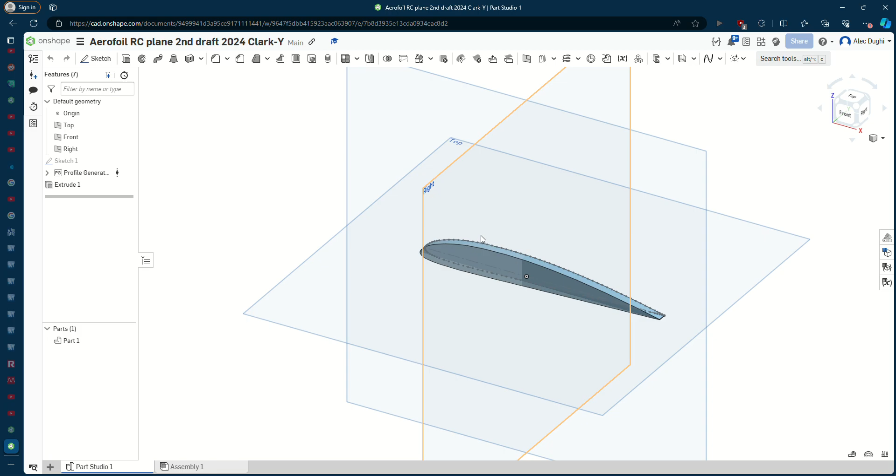I'm gonna try this kind of format because it's easier for me to just talk instead of typing everything out. That way you can speed it up and all of that, because I talk a lot.

Short answer to your question, and I'll write this part out: we'll do 3D printing. Cardboard is harder to deal with than I anticipated. I just put together half of a wing today in cardboard, and it's not pretty. So, and that wasn't going to be our final thing anyway, so let's just jump to 3D printing a little early.

And I love what you have so far. Awesome, you have the Clark Y airfoil. I'll say we'll keep that for now, but we might want to move towards a different one in the future. But for now, this is perfect. This is the one I told you to use, so awesome.

And the reason we might want to move to a different one is just the height here. We might want a little bit more height to make it stiffer, right? But honestly, we might not even need to do that, so we're gonna stick with this.

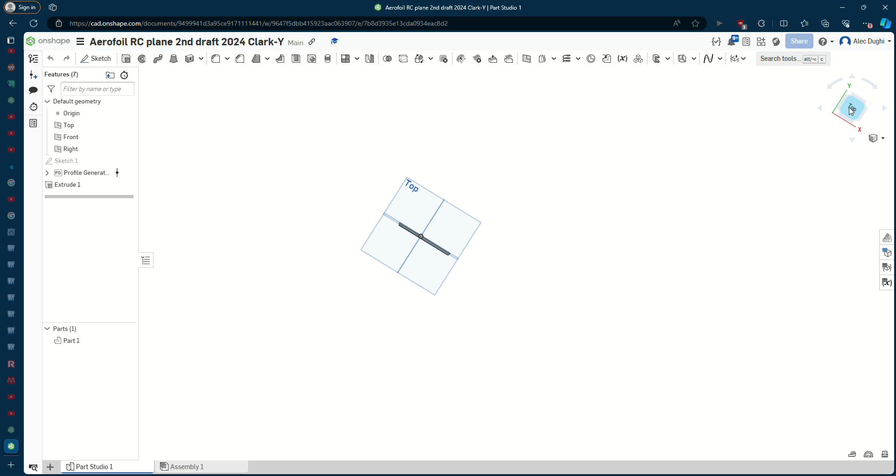Very great, so your extrude is 3.5 millimeters. Thinking about that in terms of real scale - I know you're not in front of me right now, so you can't see the monitor, but this doesn't scale because it's going to scale to your monitor. That's probably close to 3.5 inches on my screen right now, or 3.5 millimeters in real scale, right? So I always like to zoom out and see what it's actually going to look like, because it looks different on a computer than it does in real life.

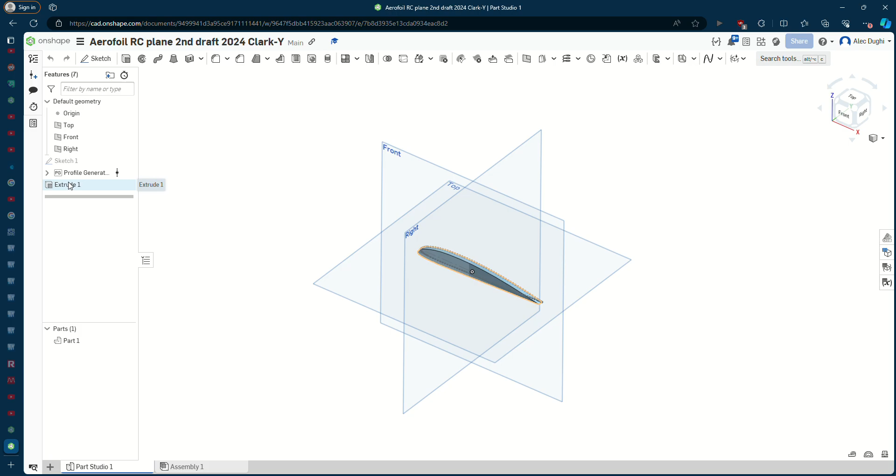So anyway, having said that, I think that's fine. I think we can go even thinner if we extend the edges out, right? I'm gonna make a branch. I'm gonna try to make a branch.

It should have worked. Okay, I'm gonna make a branch from here. Don't worry about what this is, this is just me. I don't want to modify any of your work, right? Because I don't want to ruin it or mess it up. And I want this plane to be yours.

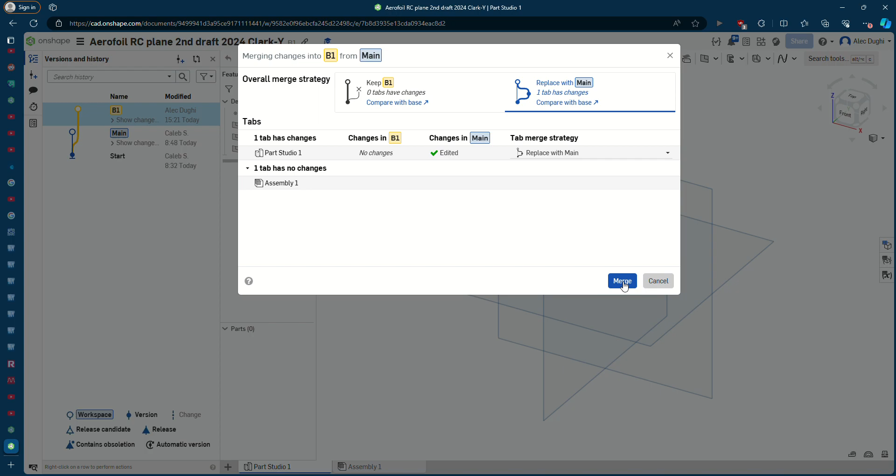So this is your work unchanged, and this is the new version of it that I created. Right now there's nothing in it. All I did was - I'm in this one, I right-clicked on what you have so far, and I'm going to say Merge into Current Workspace, and it's going to take the B1 version and replace your changes, so replace it with main, which is the extrude and 3D print and all that, instead of me having to redo it myself.

Right? So this is still unchanged, this is yours. This one, maybe I'll title this something better than B1. Some people call this a fork, in like version whatever - yeah, I'm not gonna go into that.

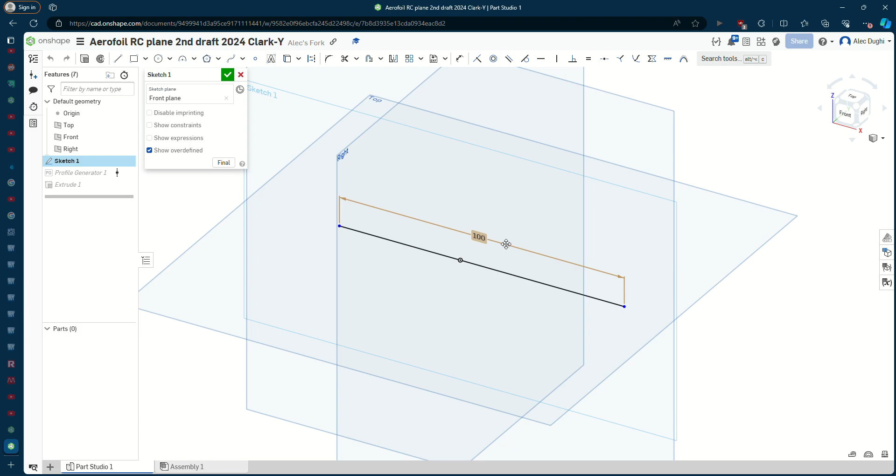Okay, so great, we have a sketch, and this is exactly right, 100 millimeter chord. What I'm gonna do is up here - so there's all these different geometric constraints, right? And you know a lot of them. You know what concentric means. You know, like coincident does a whole lot of things, right?

Tangent - you want to make a line horizontal or vertical. Like right now, this is horizontal, right? So I'm gonna click N to face the sketch fully, and the black means it's fully constrained, right? That's great, so that means the length of that is fully constrained. But the position, you can still drag it anywhere - you can drag it only on this line, right?

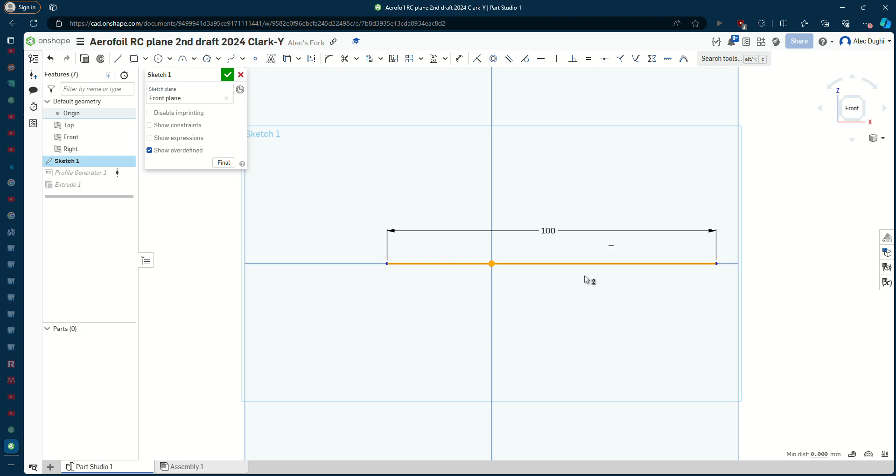So maybe there's a coincident or a horizontal constraint between that point and this line, right? I'm going to add a midpoint constraint. So it's going to say the midpoint of this line - it knows that this line is 100 millimeters long - so it's going to find the midpoint for you by itself, and it's going to say we want the midpoint to be whatever point I give it. So I'm going to give it this point. All I've done is clicked on the point, clicked on the line - the order doesn't matter, you can click on the line and then the point, and then click midpoint. And now it's shifted.

You can double check. If I want to, I can measure the distance between this point, and that's 50 millimeters, and of course the other one. Okay, so that's not super important unless you're placing the piece. By the way, you could do this a ton of different ways, so that's how I chose to do it.

If we want to delete that, you hover near it, it'll show the constraint, and you can literally click backspace. It deletes it, and now we're back to where we were. Instead of that, you could say you want it here instead.

You drag it along - my mouse button is clicked right now, left mouse button - and then if I let go, you see the coincident constraint kind of pop up here? It's kind of hovering, and the point turns yellow and all of that. So that means it's inferring that I want to make that constraint. Okay, so it's going to snap to it.

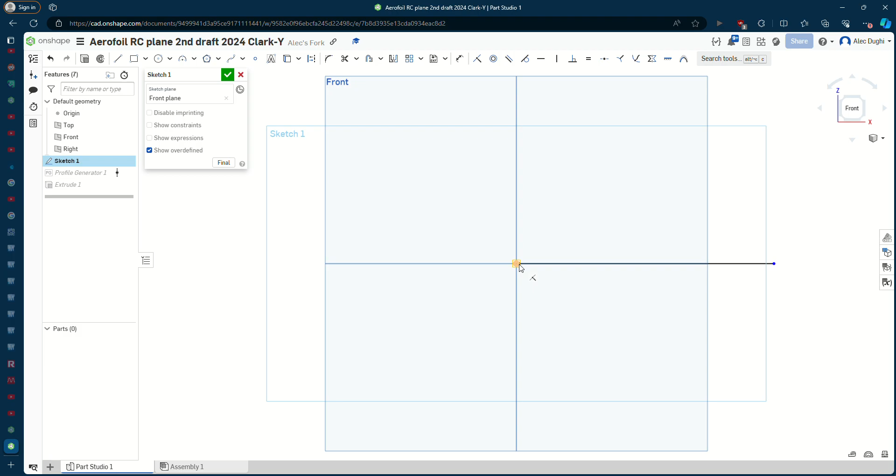Even if I'm not perfect, I'm still holding the button down, just zooming in a little bit. So you can see even if that point is peeking out a little bit and it's not quite perfect, it will snap to it, and all of a sudden it pushes it to be perfectly coincident there. So again, this is now unmovable - it's fully constrained because we have a location, a distance, and a direction.

Okay, I'm going to delete that again. Sometimes you can't quite find the constraint. In this case, everything is horizontal because this line's horizontal, and I think what happened was we made this point vertical with this line. So now if I delete that, now I can be moving it again. It's kind of weird how this works.

So we can go again - instead of snapping to it, we can do that manually. We can say that wants to be vertical, or probably with the point is what happened. And that just means they have the same z values, we're in the z direction. Okay, I'm going to delete that again.

If you don't want it to snap - if you wanted to just get it really close, and for some reason you don't want it to be exactly, you don't want to form a closed loop or whatever - when you feel yourself getting close, if you hold down Shift, your left Shift, then all of a sudden it stops showing up. And so now I can put it even closer than I put it before.

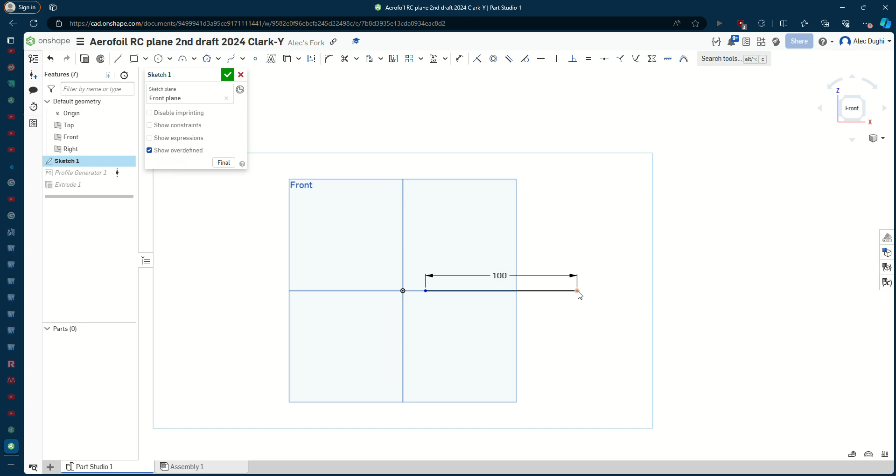Remember the purple was peeking out, and now if I put it right on there, there's no purple peeking out, and then I let go of my mouse button before I let go of Shift. Hard to see, but there's no actual constraint here. See, this purple is still purple, which means it's not defined. I've just shifted it over, but it's as if I shifted it from here to here.

Except I just got it really close here. I mean, another thing you can do is snap from this side, and I'm not holding Shift at all - I'm just doing that. And so again, it's not going to do that because the thing I'm controlling is over here, so it's looking for things to snap to over here, not over here.

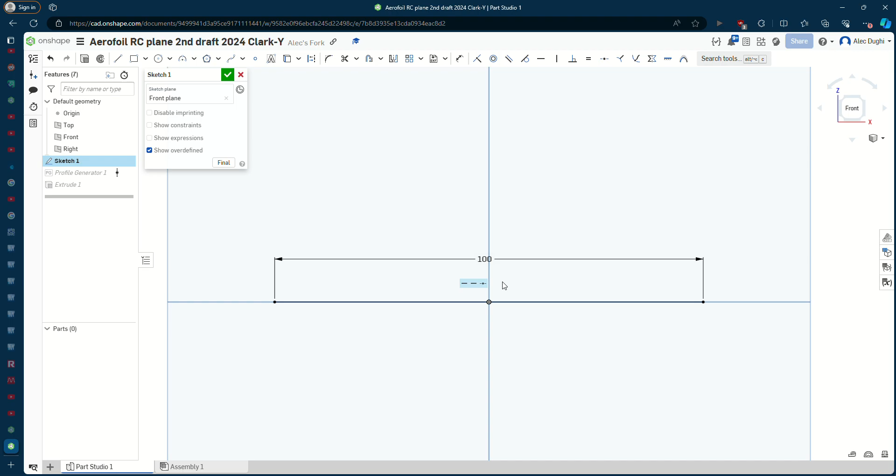Yeah, okay, we're going to build up the knowledge like that. So we have this now. Perfect, I wanted it to be in the center. It doesn't have to be, but that's what I wanted, and so that's what it is.

And then we have the profile generator. You did this amazingly. If we wanted to - it's not facing the right way - we can switch it like that, so that mirrors this up and down, and left and right.

Great, if you don't want to use the database - this stands for University of Illinois Urbana-Champaign. It's a very prestigious university for engineering, and so they have a ton of airfoils. This is not the full airfoil tools thing, but it has a ton of them - it has most of them, maybe all of them. You have single spline, so that's splining the whole thing.

We're not even going to worry about that, actually. I won't even get to that. But I will get to trailing edge type - you can see straight versus curved, and if I click on curved right now... whoa.

Okay, for some reason it's not completing. I've never seen that before.

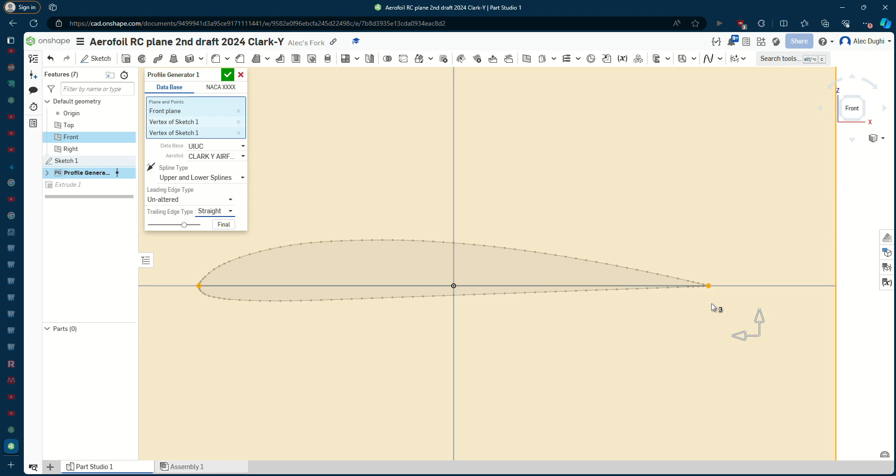We're gonna leave this as straight for now. On every other one of these that I've worked with, the same profile generator, just every other different airfoil. If I click, let's say, if we make this, no matter what I have in the bottom here, it doesn't look like this. It looks like a full curve, a full point. So usually it's a trailing edge, right? So we want it to be sharp, and this is definitely not sharp. It looks sharp because when you zoom out, it looks sharp, sure. And it's sharp enough if we were to 3D print it, probably, because the printer's not going to be that precise. But for things that we need to do, we'll see how this works.

Okay, I'm going to delete my changes to what I did to your thing. Now there's two things. What? Why are there... Okay. What's going on here?

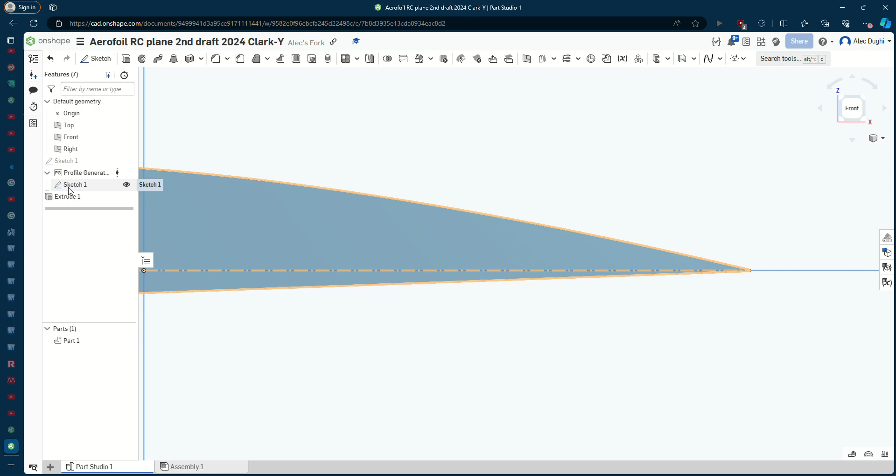This is what I meant, by the way. Right? So this is a single spline, right? And so it's taking... when I say spline, I'm going to hide everything for right now. When I say spline, I'm talking about this curvy thing, right? And so I can draw it, and the main parts of this, you notice how this changes behavior when I connect it or don't connect it, right?

If I put it really close, right? So this is another example of why you might want to not snap it, right? So I'm holding shift right now, and I'm getting, still wants to snap. Okay, but I'm getting it closer than I was. Alright, this is really weird right now.

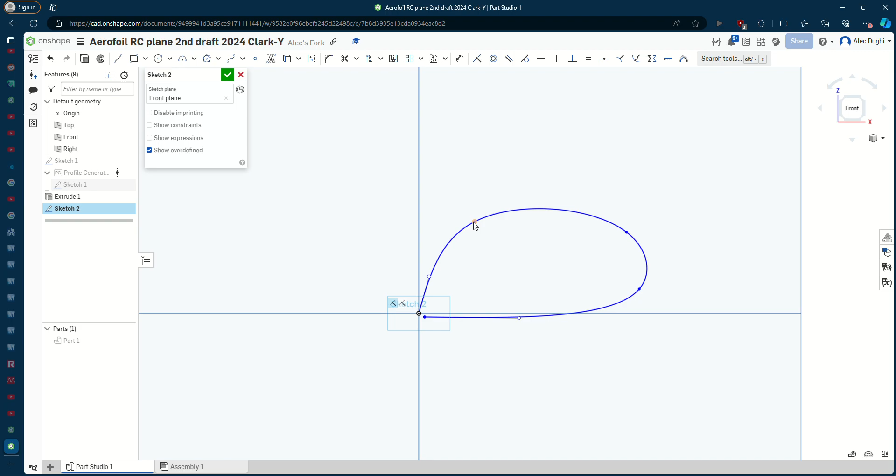So the main points of the spline tool is you can change the position of these points, right? And you can change their slopes, right? So we talk about slope, right? This is just a point in space, but it dictates where the points next to it on the curve go, basically, by its slope, right? And so, you know, if we bring its slope down, these are like little handles that we can drag, then the whole thing changes.

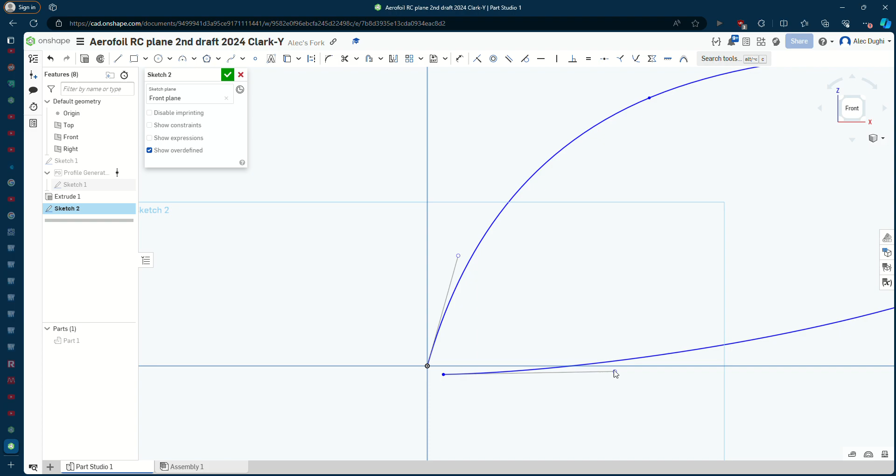But the main important bit is, like, this is a curve. It's very curvy. There's no sharpness to it, right? And that's because the other part of this is these slopes have to be equal at some point, right? So this one slope has to be tangent to the other one. It's actually fairly simple to code, but it's not necessarily so simple to even think about. Right? So people, you know, graphic designers spend some time learning how to use this, because sometimes it does unexpected things.

Right? Anyway, so when we say single spline versus double spline, right, what we could do is, if I connect this right here, it doesn't like it. I'm going to start over and make a new spline. And by the way, there's two types of splines. We're going to work on this one for now because it's just the simplest.

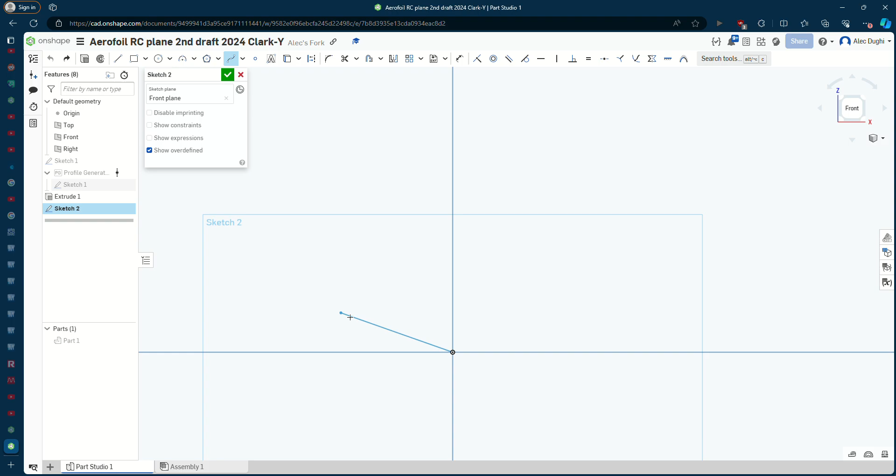I'm going to make one. I'm going to make a real airfoil, because why am I being abstract here? There's no point. So I'm going to make the trailing edge right here, and the leading edge will be somewhere to the left. Right? So it's going to be the simplest airfoil in the world. It'll be like that. Maybe there'll be one there and one here.

Right? As soon as I connect this, if these points aren't close enough to the end here, then it's going to make this kind of smoothness to it, right? And the closer I drag these points, the sharper it'll become, right? Right now it's trying to snap this so that that goes horizontal. I don't want to do that, so I'm gonna go like that, place it wherever I want while I'm holding Shift, and it's good, right?

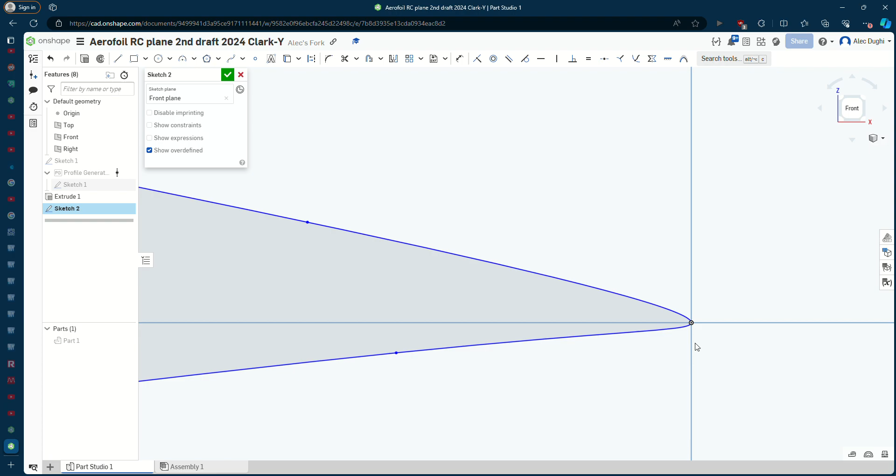And so now that's gotten pretty sharp, right? It's still curvy, right? Because it's always going to be curvy, because that's the point of the spline. But it's much better. It's fine for what we're doing, and then we can change the shape. We can add more points in here if we don't have enough points anymore. But there we go, right? So that's one thing.

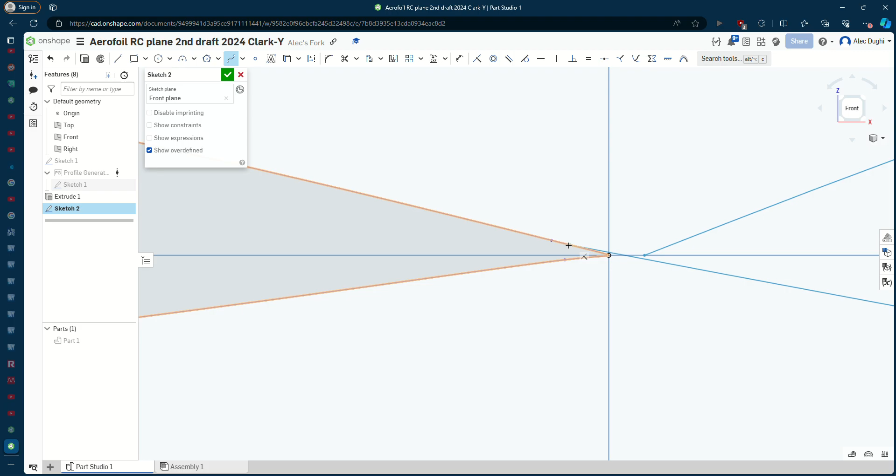If we don't want to do that, what we can do is the same thing on the other side. It's going to be like a mirror image, except I'm not very good at drawing. So this one had 1 at the end point, plus 2, 3, 4, 5 points, right? I'm going to do the same thing, have 1 end point - actually this will be the same end point. So there'll be 1 here, 2, 3.

We'll try this - I don't know why that's there. I'm gonna do it in 2 separate splines though. So I'm gonna have another one here. 2, 3. Because they're sharing these points, it's 1, 2, 3, 4, 5. I accidentally made this horizontal with that, which may or may not be what you want, but for now I'm gonna take that out. And so you see this, right?

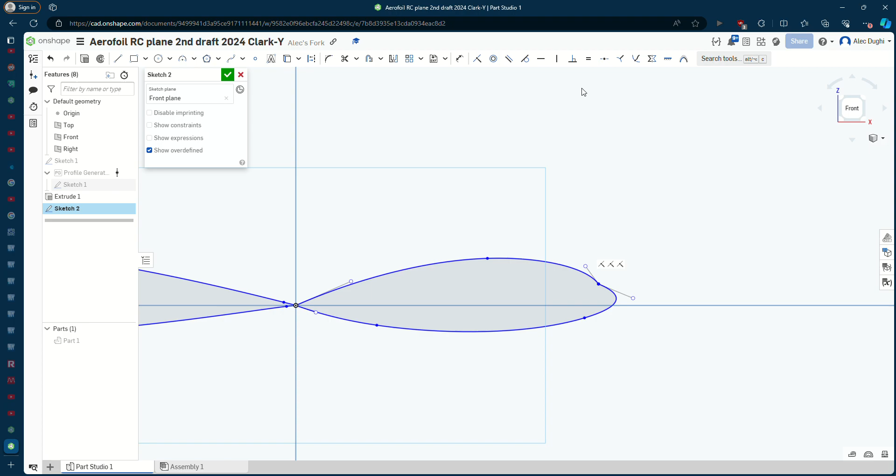And so we can change this however we want, and we can make it not nice, but we want to make it an airfoil, right? Which means these two have to be tangent to each other. So we're going to use this tangent function. I'm going to say this curve is tangent to this curve. When we do that, the whole curve is tangent, and it doesn't like that.

What we mean is just these 2 points. So you could go this handle be tangent to this handle, or to this curve, or actually what we're going to do is just coincident. So this handle is coincident to that handle, and now they're going to be in the same line because there's 2 lines. The only way for 2 lines to be the same is if they're in the same line. And there we have it.

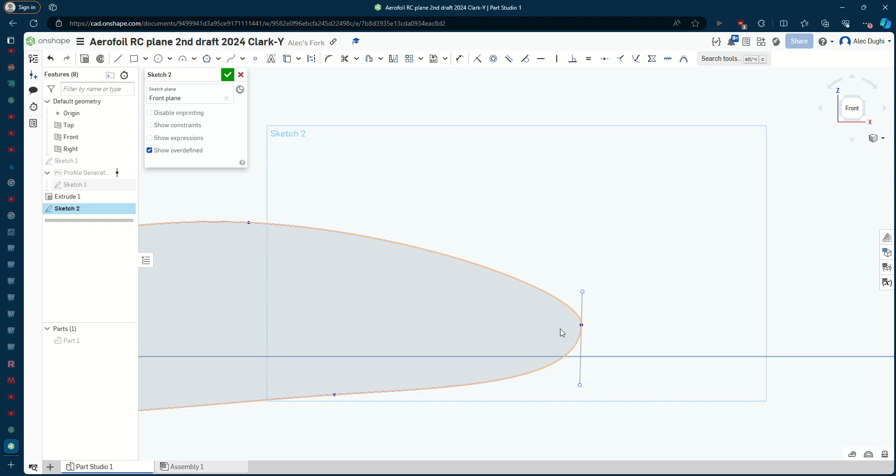So we're going to move this maybe down here. Maybe we want it - if we get this away from it, it'll smooth it more. Let's see what else. We can go like that. So we have a little more control now. Bring that, and this - the main thing though, besides the control, is the sharpness.

Which is more aerodynamic and it's more of what we want. However, it doesn't really matter when we're 3D printing, because in 3D printing, it's going to end up being a curve anyway. The printer is going to come here, do this line. It's not going to stop and come from somewhere else to do the other line. It's just going to go like that. And if it's going really fast, then that looks like a curve. Maybe it rounds it very nicely - our printer is very good, but it's not good enough. So it'll look more like this, and we can sand it down and make it sharper later.

So that's a pro for this thing, maybe. Aerodynamically, again, we want it to be like this. However, and the reason for that is you have air going over this. You have particles, individual particles, and you're gonna have this boundary layer. So you have air coming in here, it wants to go around like here. I'm not worrying about any of these constraints or anything like that.

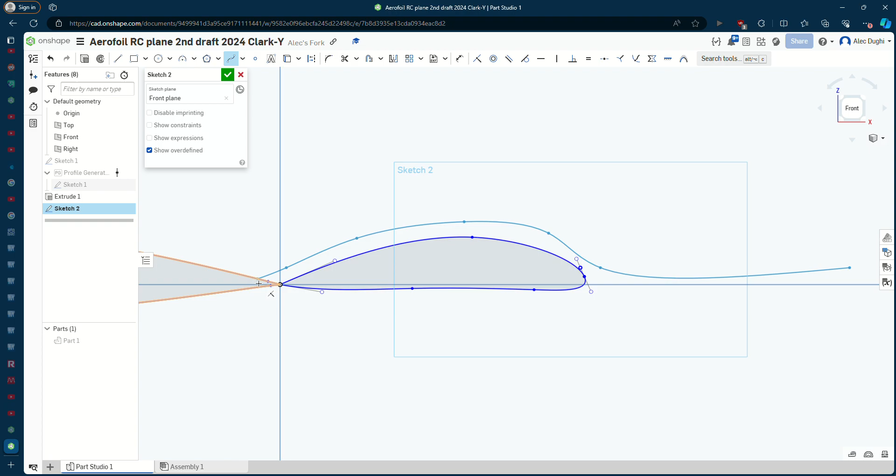So it wants to go like that. There's some particles that are going to go the other way, but the main point is they start out relatively the same, air over here, and they want to finish the same here. So they want to meet up with each other, and the only way to do that, or the most efficient way, is a sharpness here. You want to give it enough time to separate. You don't want to separate it too much.

You start going like this. It's funny, actually, some of these constraints kind of work, but don't - this is not a real physics explanation, so don't get... I'm getting way off track. If your airfoil looks something like this, then the air is going to just go over it, and it'll go into that bump a little bit, but there's going to be separation here. And so the air isn't gonna - it's gonna be kind of a blank space under here, and that's gonna provide a lot of drag.

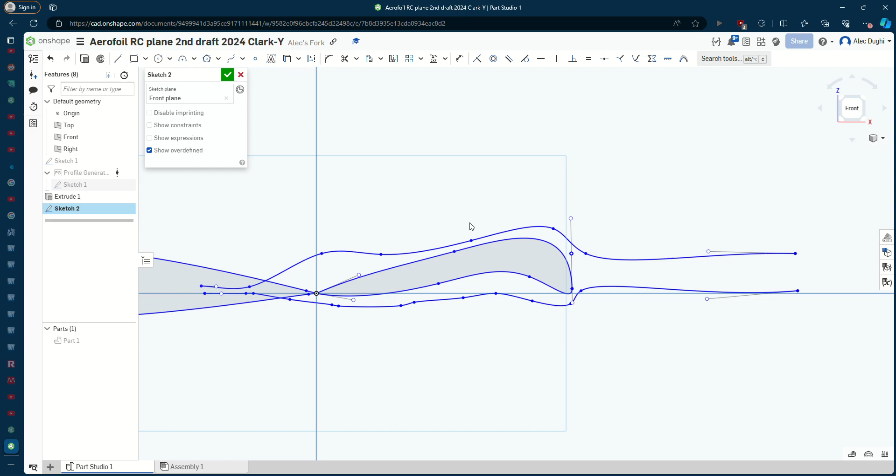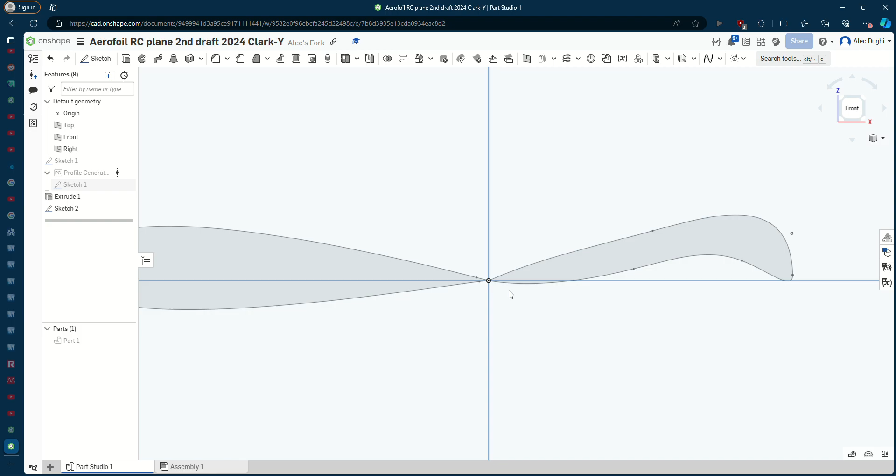I might just cut this. But the main point is there's these 2 different types. And specifically, these 2 different types exist philosophically, of course, but they exist also as tools in this profile generator, more importantly. And so, again, we want the sharpness, but if we use the sharpness - and I remember showing you that this loft tool was acting weird. So we're going to talk about loft again.

Okay, I messed that up. What?

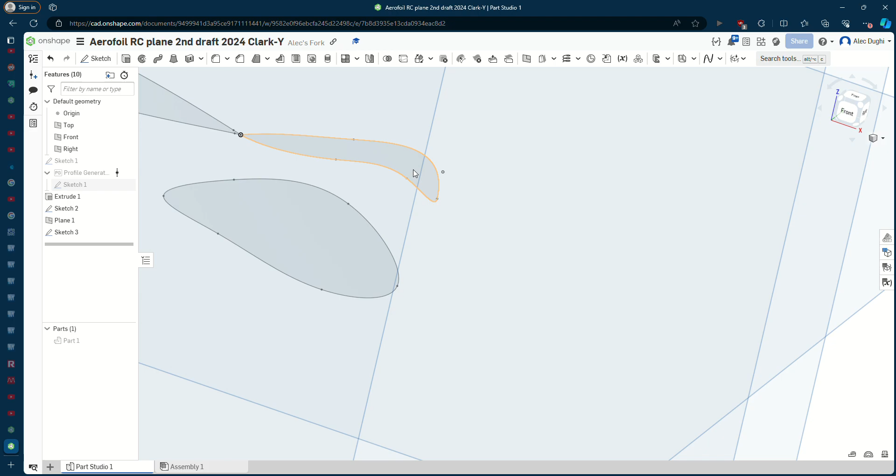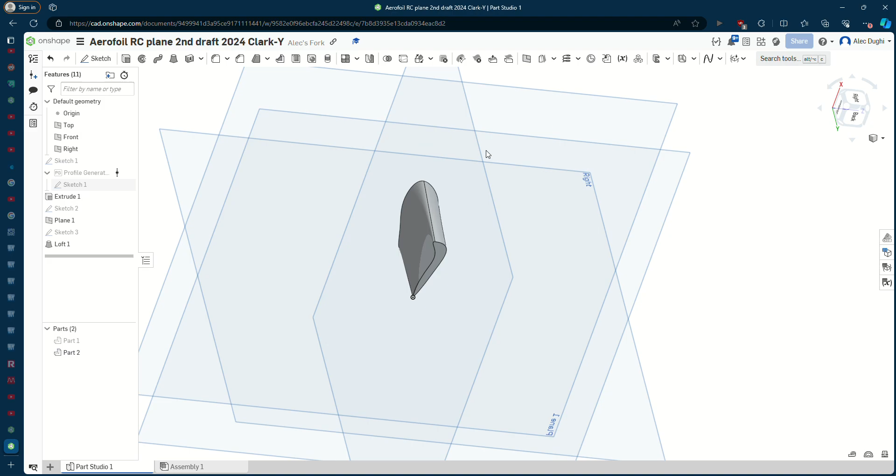Okay, so again, lofting is taking this and going to there, right? It would make some solid body out of that. And if you think about it, you could do that infinitely many ways, because even if this geometry was fully defined, you can have it follow any type of curve. But we're gonna try to do this as simply as possible. So maybe I don't even know the algorithm, maybe it's just the least distance from this point to this point. It makes a straight line, but then it has to have the exact number of points from here to here, so it does some kind of algorithm, and you have that.

If I had some sharpness here and I tried to do that, it might be fine for the first little bit. So sorry, I got kind of, again, this coincident. Alright, that's a pretty ugly looking airfoil.

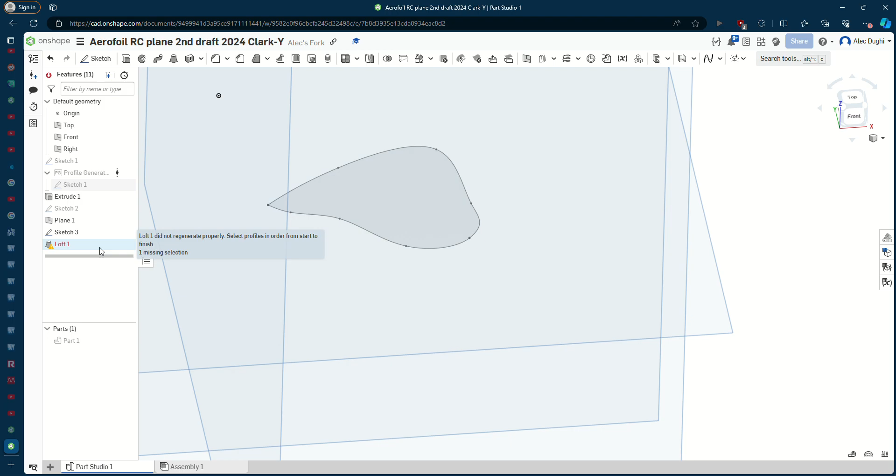Okay, so it still works when I'm trying to show you it not working. Okay, if I click this, does the recording? Okay, if we're still recording, this is when it doesn't work.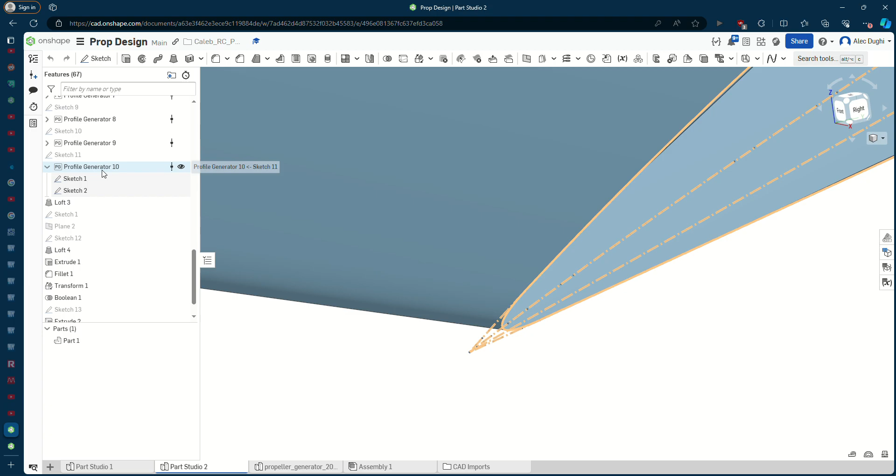So this is a propeller design that I was working on last week, and it's done basically. But all I was trying to say, so maybe I should just cut all that. All I was trying to say was...

It's taking a second. The profile generator, same thing, right? You choose your plane, you choose your points. I'm using the NACA instead of the database. You might be able to find a NACA airfoil in here, the right one, but it's easier if you just... yeah, these are all NACA.

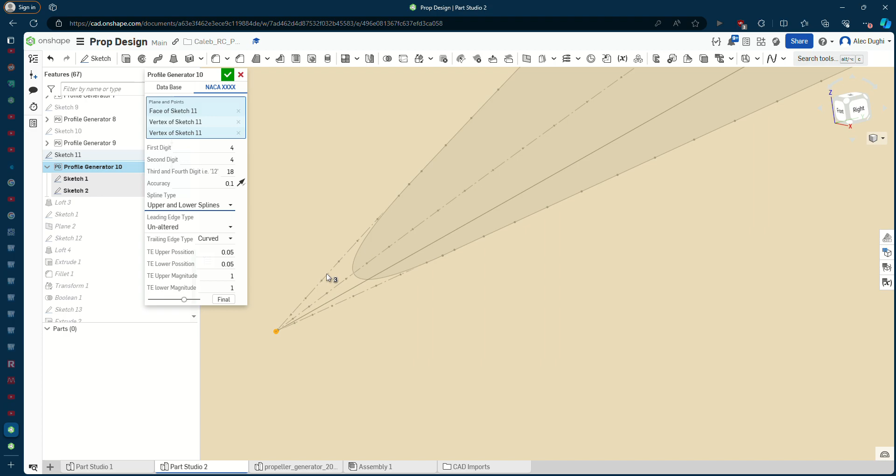4418. So if I click this versus if I type in 4418, it should be the same thing. I chose upper and lower splines. The main thing I chose was curved, right? And this was not working for a long time until I chose curved. And so that's basically the sharpness here. It keeps it as the geometry, because that's what the wing actually looks like. And then it adds this curviness here, so that it's not a sharp point.

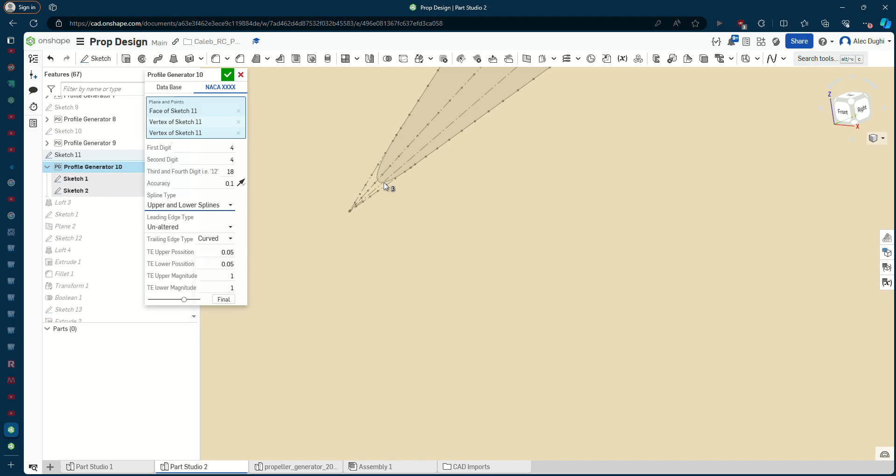A singularity is what I would call it. So the loft, however it does it, is going to take all of these points and map them to something over here, which means mapping every single point between the space from here to here. And you can do this for many different profiles. So I did it for 10, probably too many, but it goes from here to here to here, and so on. And it would not work with the singularity here, because it's trying to match slopes and positions in all different dimensions, and it just doesn't like it.

So anyway, loft, if you ever have a problem, and honestly in a lot of CAD, if you ever have problems, it's probably because of some sharp points or some self-intersection. So that's what I had to do.

This is a propeller that I've 3D printed. It works decently, and I will talk about this a lot more sometime. But for now, back here, aren't you glad I made my own version now?

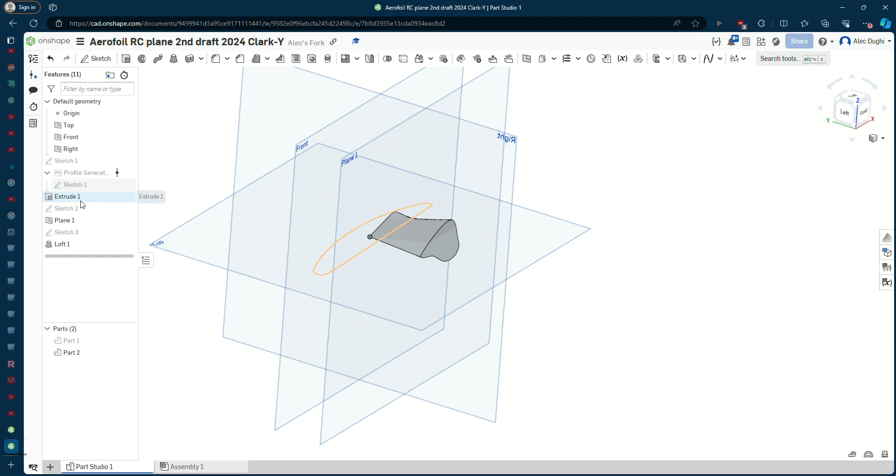I'm going to go ahead and delete all of this, and we're going to show your part, and get back to it. If you don't want to see these dots, you can hide the sketch, but it's not a big deal.

And again, this is some weirdness. I've never seen that before. So we'll see if this works, or we can move to a different airfoil. It's not a big deal. So we have that. Great.

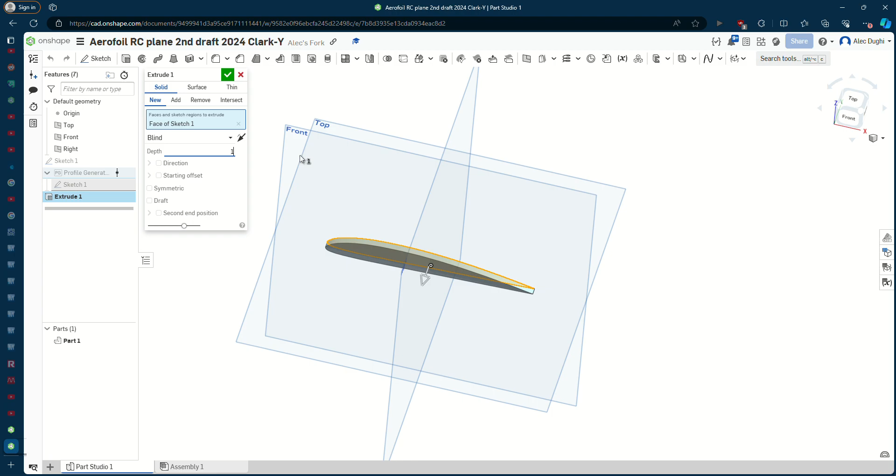I'm going to make that a little thinner, maybe 1 millimeter, if we can kind of just extrude the outsides of it. So I'm going to click here, I'm going to make a sketch.

I realize I've been talking way too much, so I'm going to try to do this very... I'm not going to explain so much, I'm just going to do what I'm trying to do. So I mean, I will explain a little bit. Okay, I'm not.

Okay, doesn't like that. Oh, at that distance. So I created a sketch on the face, and I'm trying to offset this profile. Another thing about offsetting and sketch tools in general, there are tools like mirror, for instance, or linear pattern, or any of these things. Fillet is right here.

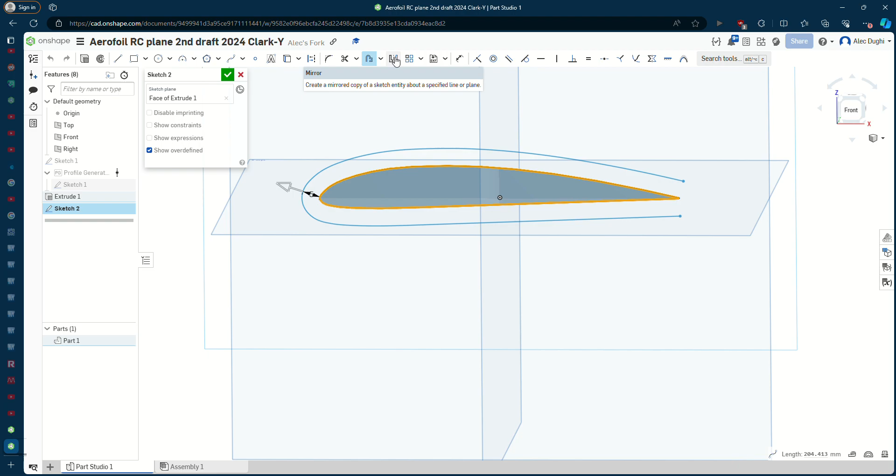Almost all of these things are better in the 3D version. Sometimes you can't get away with using it, but I absolutely hate using mirror sketches. I would rather, if I had to make some kind of shape, make that shape again on the other side, and just put in the necessary dimensions and geometry constraints. I can make this horizontal here, or whatever, and keep doing that. I'd rather do that because this thing is not modifiable at all.

If I do this, I'm going to select the mirror line to be this thing, and go like that, and that's it. Once I click out of it and click something else, I can't change this, or I haven't found a way to. You see these constraints, and that's great, but then I can't double click to edit this mirror line, or edit what I'm mirroring, or whatever.

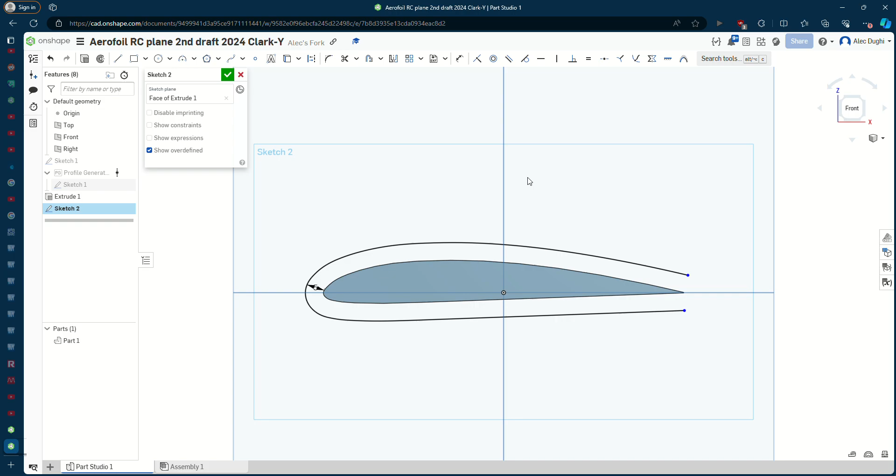And so you can do that too. You can use mirror outside of sketching. Okay, we're back. So offset's the same thing. You see this constraint, but that's all you see. But we're not going to worry about it too much. I'm going to go with, I want it to be on the inside, and I want it to be like 1 millimeter or less.

So I don't know how to get it on the inside, and this is exactly what I mean. Okay, that didn't work. I cannot seem to get it to modify this offset, even though you can drag this. So I'm going to delete the whole thing. That's what you have to do. You have to start over.

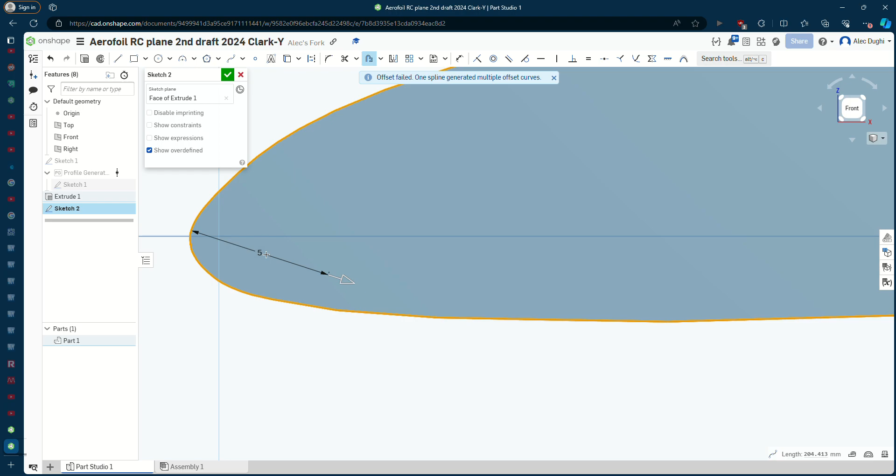I'm going to do the same thing, and click this button to go onto the inside of it. And it doesn't like that, but I think that's because of the distance it is. So I hate this so much. Okay, offset failed, it's fine. So I don't have to delete anything because it failed, so there's nothing to delete.

But I'm going to click it again. I'm going to click what I want to offset. I'm going to make it 1. I don't even know how to type it in, do I double click this? Make that 1. But now I can't click the other thing.

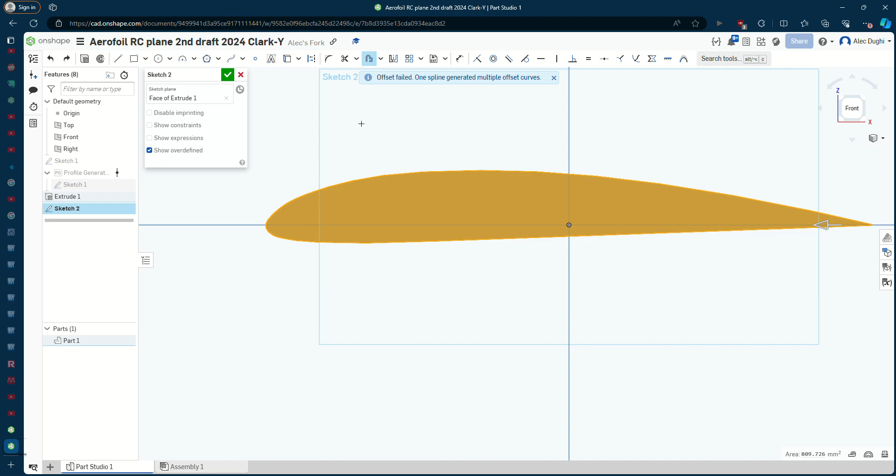This is a professional engineering tool, guys. Okay, go that, and so it doesn't like the distance, but I can't change the distance because... Okay. Very disappointing Onshape.

Again, I said, you know, I was preaching, oh, we'll use the 3D version of it. We can go ahead and do that. We shouldn't have to, but I'm going to take this edge, which is an edge of a three-dimensional object. It is not fully enclosed, it's just one continuous line. You can see the length of it, it's 204 millimeters, so that's great information.

If I wanted to create something to wrap around this to make a wing, if it's super long, like a piece of cardboard or whatever, I know that the circumference is 204 millimeters.

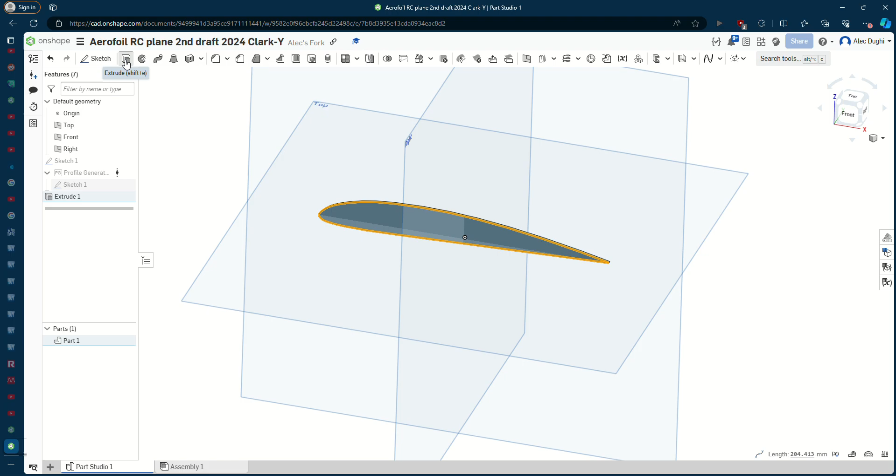So I'm going to take this, I'm going to extrude it, and you're going to say, well, how are you going to do that? It's not really something you can extrude, and you would be right. For some reason, they think it is. Okay. It thinks I'm trying to extrude the face, and that's not a sketch curve. Okay.

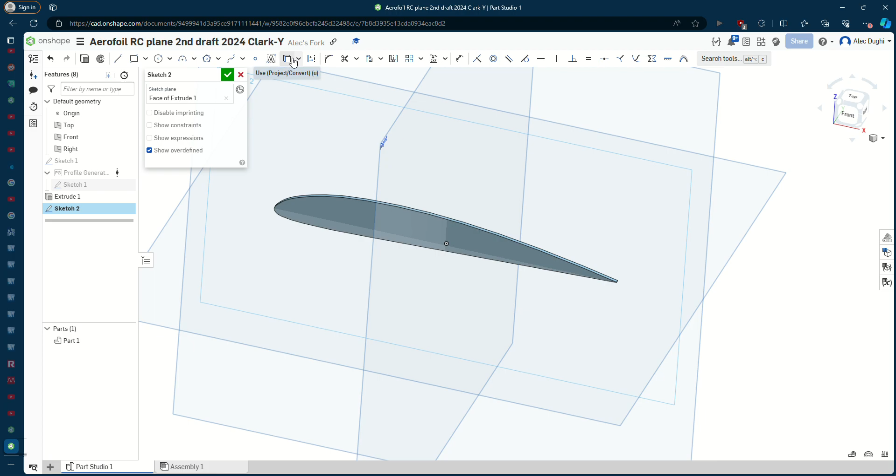I'll create a sketch on this face, I'm going to use the edge here. All I did was say I want to basically create a sketch of whatever I want. Again, I don't want to go super in depth, so I'm not going to. I would show an example of use, I'm not going to get into that, but please ask me if you want to learn more.

I'm going to go to extrude. I'm going to click the sketch. I'm going to use the surface, and there we go. That doesn't look like a surface to, oh, it does. Okay, good. So there's no distance between these.

Okay, backing up and slowing down a little bit.

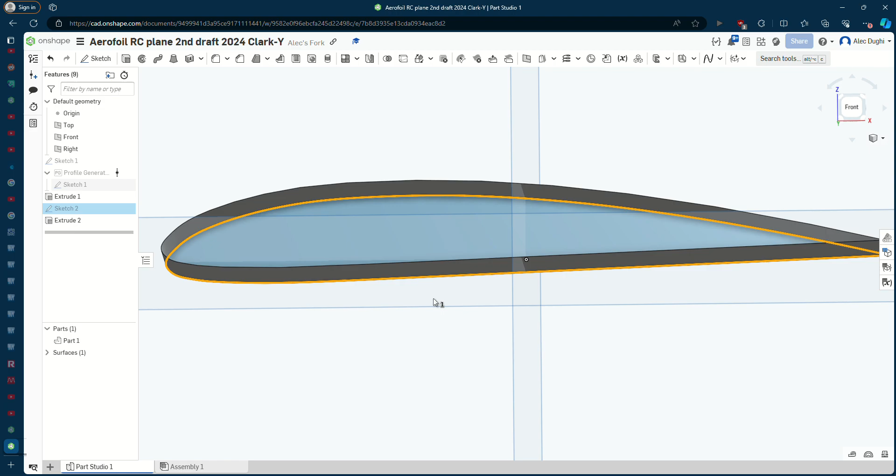Once I had this line that I liked, this is just from your profile generator, and I guess it did include this. It's fine, doesn't matter.

You can extrude a solid body, which is this one. This is your first extrude that you made. That's great, it created a new solid body, and all that means is you can, if you wanted to, 3D print this right now, and it would come out exactly like this, 1 millimeter thick, and all that.

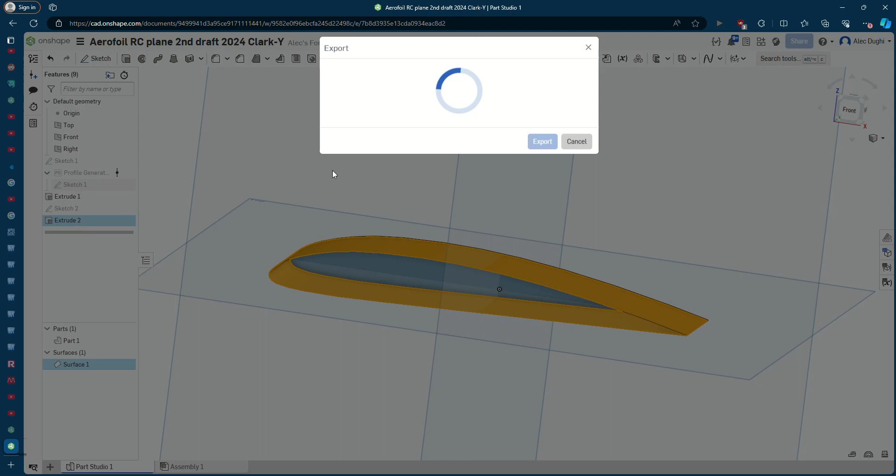This is a surface, and so it has no thickness to it at all. If I tried 3D printing this, export as an STL, I think it would show up as a problem when I tried to actually click print, because there's no substance to it. It's just kind of a mathematical tool to represent position, like a set of points.

But a point, again, is non-dimensional. It doesn't have any substance to it at all. So this is just a collection of points, an infinite collection of points if you think about it.

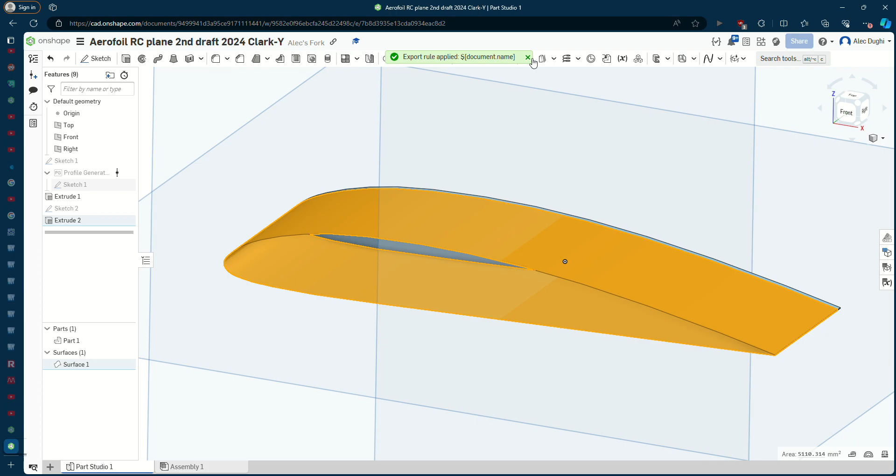So we're going to use thicken, and now we've turned this surface that is non-physical into a real thing. If you're trying to thicken it too much, so I thickened it on the outside, it was completely fine, with 5 millimeters. You can thicken it however much you want, because it's not intruding on itself. And so that is kind of a crazy thing.

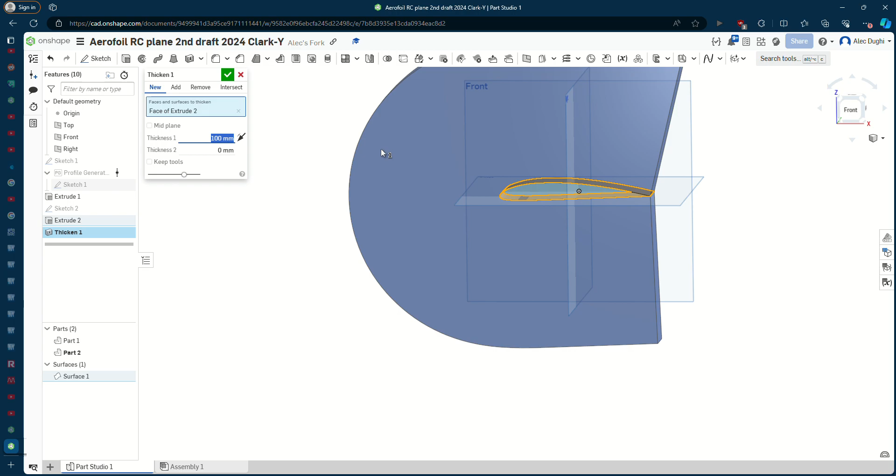But if you pick a point over here, the corresponding point here is exactly where it should be. And if you were to extend this all the way, this first nose bit should be exactly the same geometric shape as this nose bit. I don't know that for a fact, but it's starting to look like it. I'm gonna go back to 1.

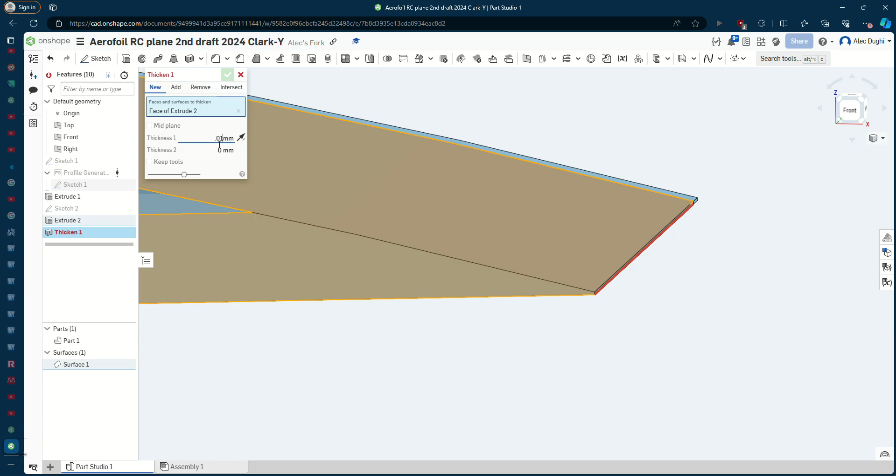I'm gonna change it to the inside, and now the inside is kind of fighting against itself, because if it starts intersecting itself, it doesn't like 1 millimeter. It doesn't want to intersect itself - so that's the thickness right now, I think it's 0.01 millimeters. Something is weird. But if it starts intersecting itself, it doesn't know what to do, it kind of freaks out. We're gonna keep it as that.

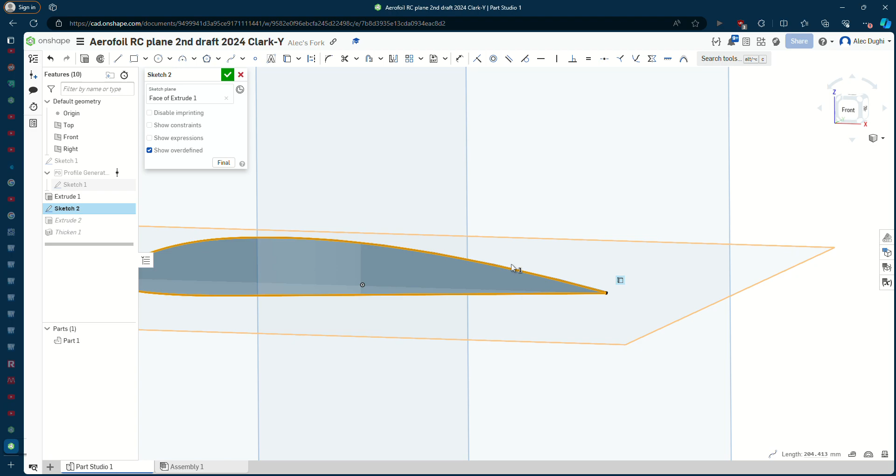I'm gonna go back into this and delete this part, so that edge still exists, but in this sketch, it's not a line. This sketch, this is a line - that's what the use function did. And I only want to use the curve, I don't want to use this bit. This is kind of the tail of this is all weird.

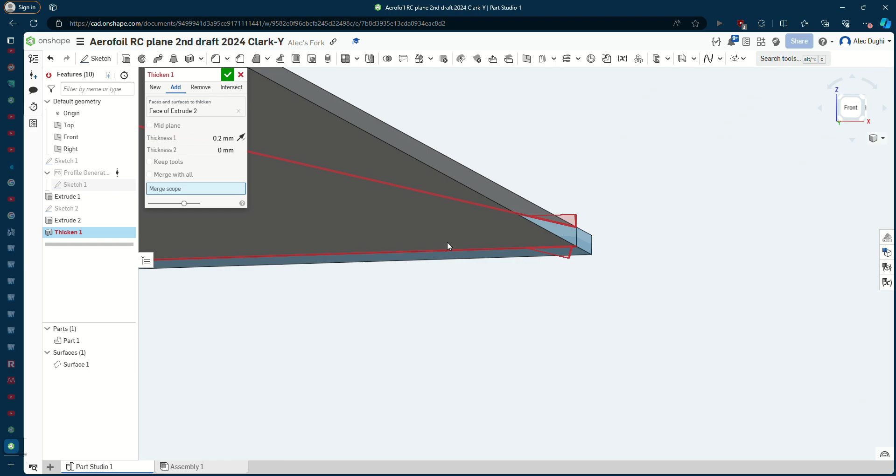So I'm gonna go back to thicken because somehow it reverted to 5 millimeters. Change it to 1, change the direction, and it still doesn't like it. Let's go with 0.2 millimeters. It's doing some weird stuff here, some very weird stuff, I don't know what it's doing. Okay, that's what we want, but because of this, it's being very weird.

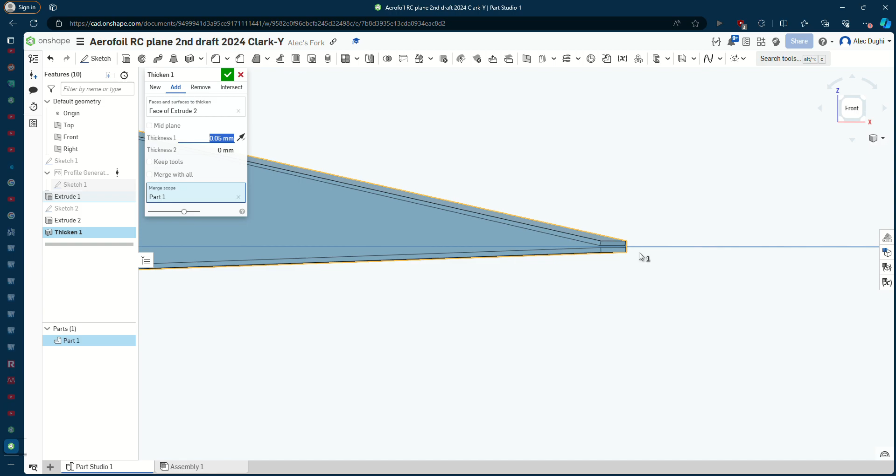This is exactly the situation where engineers will blame the CAD software, and the CAD software will blame the engineers. It's probably both of their faults, but people grapple with this as a job - people get paid to just tear their hair out about stuff like this. So real engineering, yay.

We have now created - so we had to go to 0.05 millimeters. First I went to 0.01 just to make sure there was a floor, that this thicken was even physically possible with their algorithms. And it is. So I try to increase it as much as I could - maybe 0.06 will work, nope, it doesn't. This turns red, that means it doesn't like that. So we're going to go to 0.05 and that makes it happy.

There's a better way to do this, but I think the easiest way is just to get this sorted out. The sharpness here - now we have 2 singularities instead of 1. I don't know how this happened, but again, this is not my point.

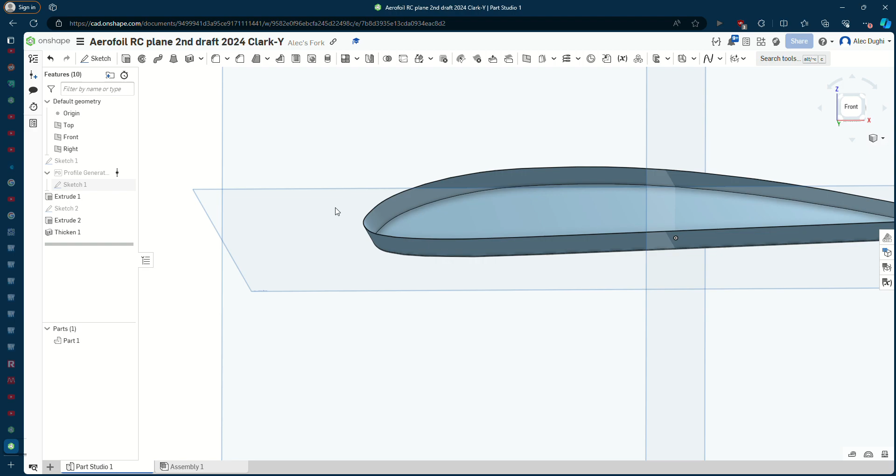So we have a thickness now. We could 3D print this part, and it would not turn out very nice, because the average width that we 3D print is around 0.5 millimeter. This is 0.05 millimeters, so that's... can't be right... 1/20th, 1/10th the width that we want. Wow, I'm really bad at math. So also we can extrude this less, we don't need that much.

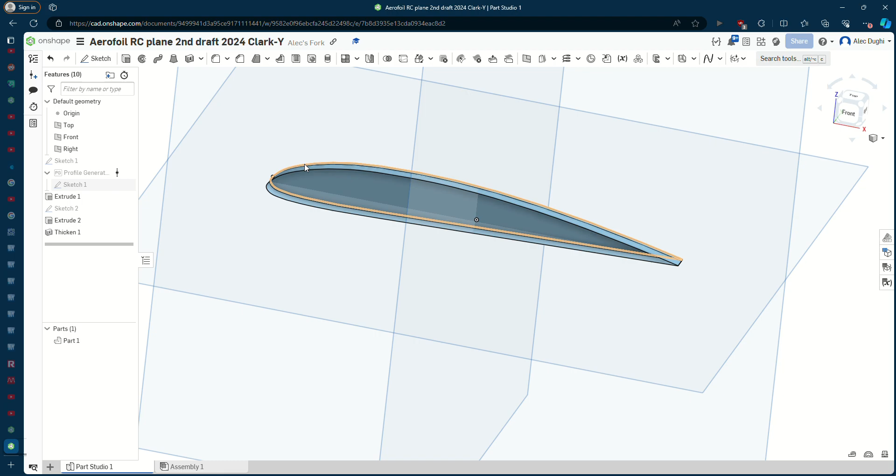But again, this is—if I wanted to do this, I would have... how do I say this? I want you to do this anyway, right? So this is me walking through it for you. In your case, if you want me to walk you through it more with you, it's totally fine. But in your case, I would first fix the tail here, and then we can talk about it.

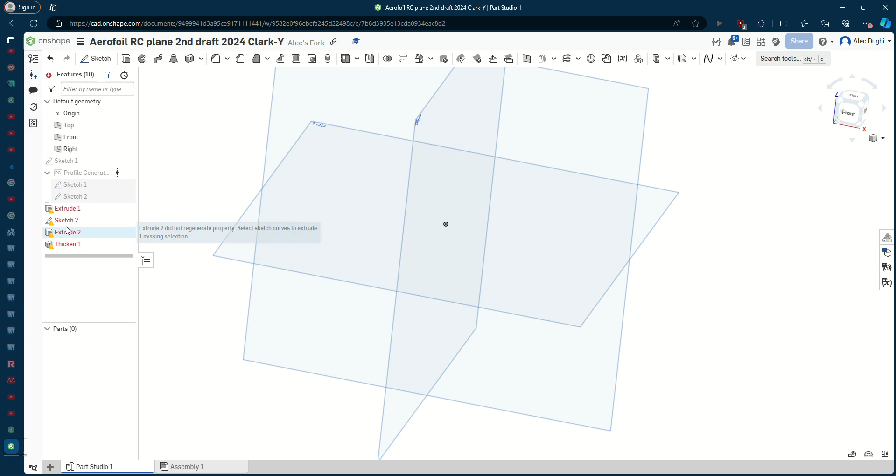So how I would do that is probably mess around with these, right? If none of that works—see, now we're seeing what I expect to see. Problem is when you change something up here, sometimes that messes with everything down here. That's totally fine, don't delete it. Don't go ahead and just delete these things as your first instinct.

What's happening is it's saying it's missing the face of the profile generator. You changed this thing, and so now you replaced it with something new, and it needs to know what you replaced it with, so you can easily take that out and replace it with that. Great, I'm gonna hide that again. This is already looking much better. I don't know why I didn't just do this to start.

Sketch, we're going to sketch that. What was the sketch? So the external references here, this is use, right? Again, it's like projecting on the plane that you're sketching on. It is projecting whatever you tell it to, right?

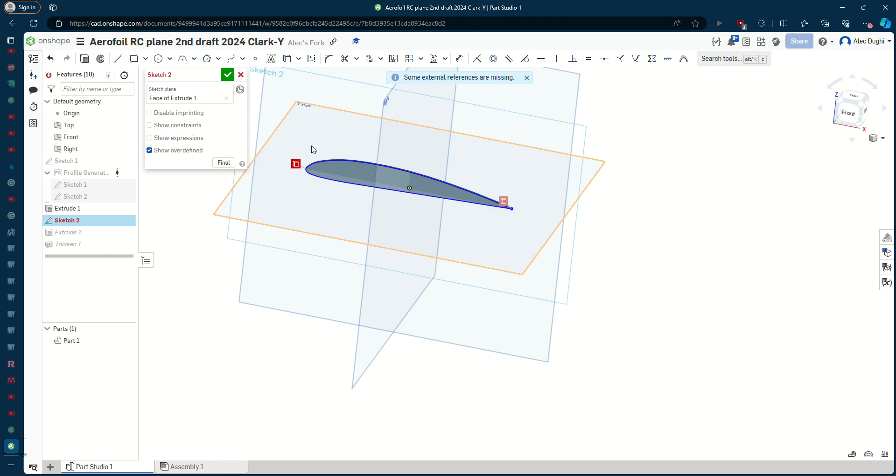The shadow of it, right? And so it's missing here because, again, that was an old body, and now this is a completely new extrude because we've updated it. So we're gonna go ahead and delete this whole thing, and then click use again. Boom, right?

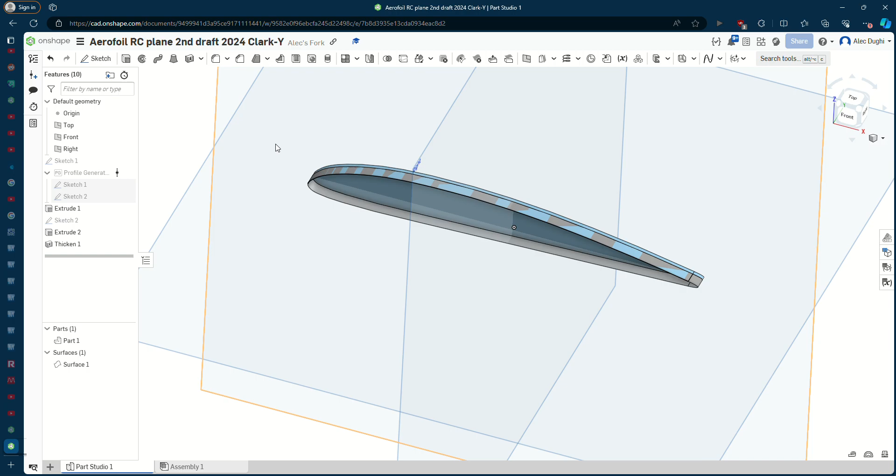You won't always have to be updating this like this, but for now, that's where we are. Now it's missing that, so we'll go ahead and merge. We want to merge it with this piece that you made before. That works. And let's see if we can get away with thickening it. Great, let's do a millimeter. Okay.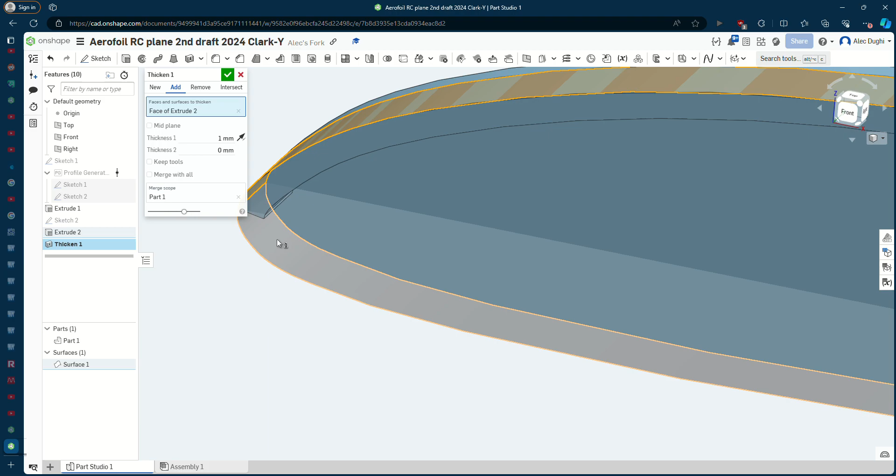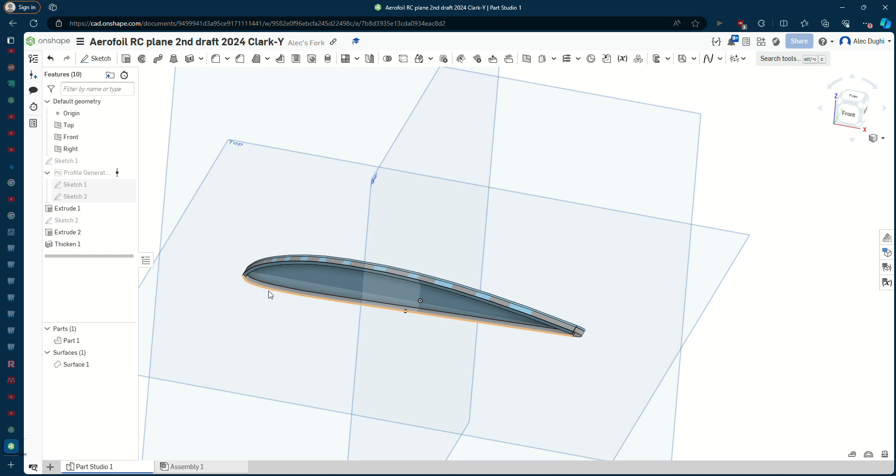Sorry, again, this is not behaving. So it likes that. That seems a lot more than 1 millimeter to me, but I guess it is. I'm going to try to thicken it in 2 different stages.

And so now it's not having this intersection problem, right? So you can see the problem that it was having before. Obviously—or not so obviously—but this intersects with that one, and so it doesn't like that, because it doesn't know what do we do about double counting this region. But now when we do it as 2 separate things, then that's okay with it.

So maybe a 3rd separate thing should work. No, this still doesn't work because it's doing that within itself now. So let's see if I can show you. With 0.5 millimeter, it's fine with it. With 1 whole millimeter, it ends up encroaching on these corners here—I think they end up encroaching on each other. So we'll bump it up to see how far we can go.

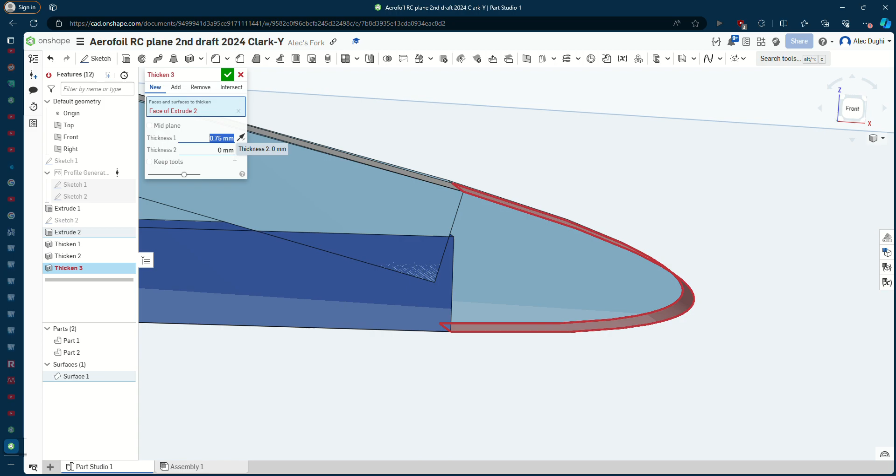Right, 0.75 works, 0.8 does not. Try 0.7—works. So then 0.73, 0.74. I hate that you have to do this, but it's kind of where we're at. And that's basically filled—there's a little sliver right here. Don't get too hung up on this type of stuff.

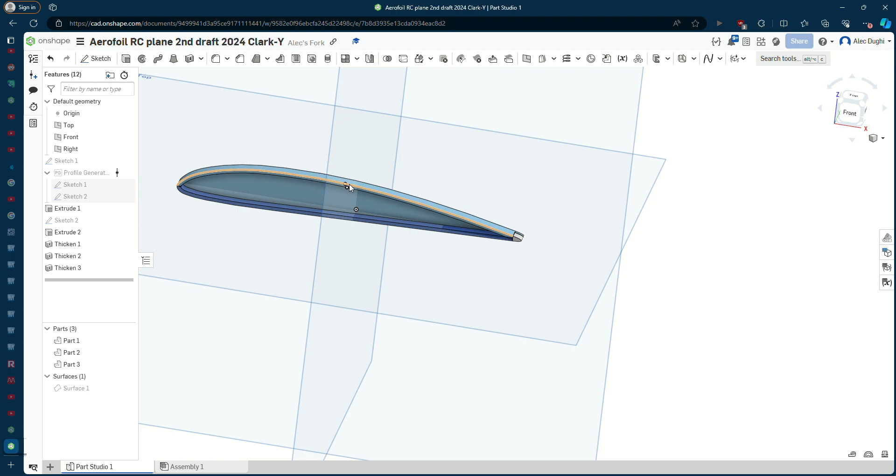I might come back to this and figure out a better option. So this is one way to do this, what we want, but there are many better ways to do this—this is just what I thought of. But now you have 3 different parts, right? We have the surface still. We don't need that anymore because we have the solid bodies that we want from the surface. But we have this surface—or sorry, we have this part.

So that's your original extrusion plus the top. We have this bit, and we have this bit. And honestly, if we went here and clicked add instead of new, we merge it with your first bit, then okay, that likes it just fine. So within thicken, it doesn't like it, but if we do that—instead of new, we're adding it, and we're merging it with just the existing body already—then it's great. It looks like that's closed up, so awesome.

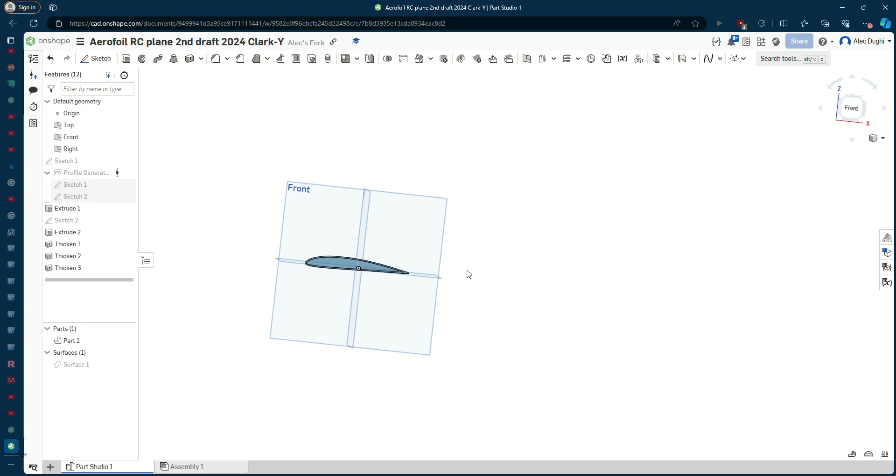So think about how, like, this is 1 millimeter right here, so it's gonna look more like that, or however big a millimeter is on your screen. It's not very tall, right? So it might not resist some serious bending. Again, we'll see, it'll be fine. We'll use this for now.

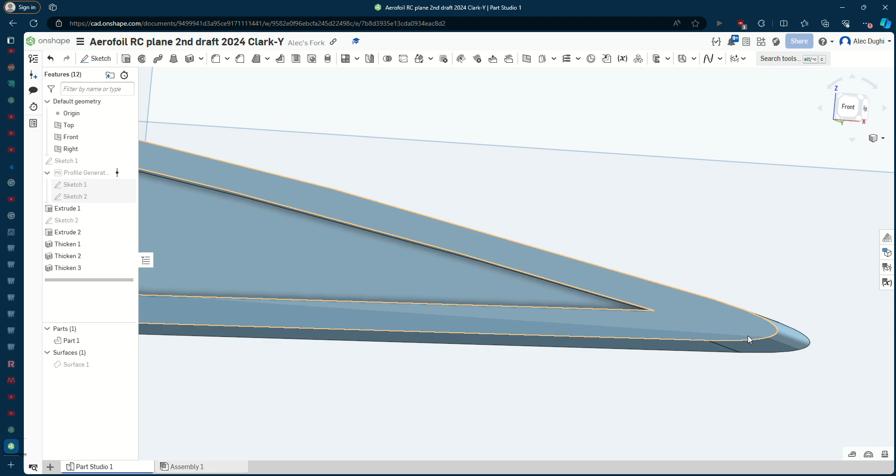So we have this. The reason I had this rib right here, the whole reason I went through all that work, looking at this now, the better way to do this is to extrude the whole thing and then cut out a section. So we can do that next time, or maybe I'll make another video.

Notice how this is sharp and this is not sharp, right? This is not sharp because of CAD. We kind of need it to be not sharp, and it's fine if it's not perfectly sharp. This is sharp. Again, in 3D printing it won't be, but it'll be decently sharper than this, and that's fine. Again, we don't care, but it's interesting, right? Actually, we kind of do care. Well, no, we don't care at all. It's fine.

You have this. Well, great. We don't have to, but I want to do the same thing to the other side, except I don't want to do all that work. So what we're going to do is mirror.

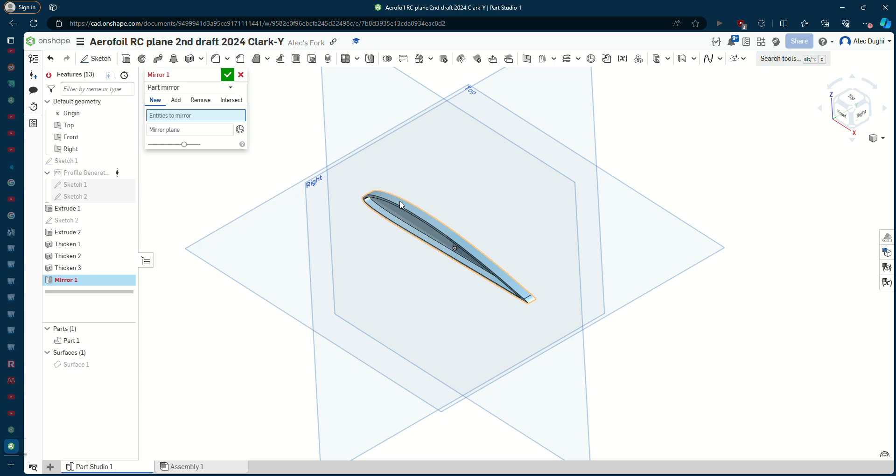We're going to mirror. It's going to be a part mirror, right? So if we want to mirror the part, we can mirror the whole thing. Well, we could maybe do that. The mirror plane would be this. Yeah, okay, that works, and we want to merge it, right?

So we want to merge it with its first half, right? So I created its own clone and then glued them together, because it's add, not new. This is a new thing. That would make 2 separate parts, and we can glue those together separately if we want, but we don't have to. We can do that here.

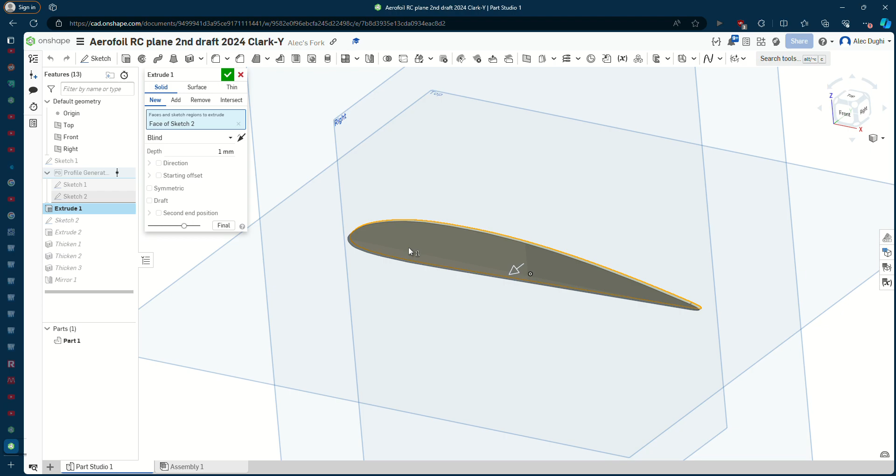Okay, so notice that the distance between this part and this part is 2 millimeters, right? Your extrusion, your initial extrusion, is only 1 millimeter. So obviously, all it says is you mirrored the extrusion as well. So that's fine, I think that's a better part in general.

Now let's talk about actually 3D printing this, right? So, let's talk about why I did this to begin with. We could totally have printed the original thing. The distance between this bit and this bit, kind of that distance, is 8 millimeters now.

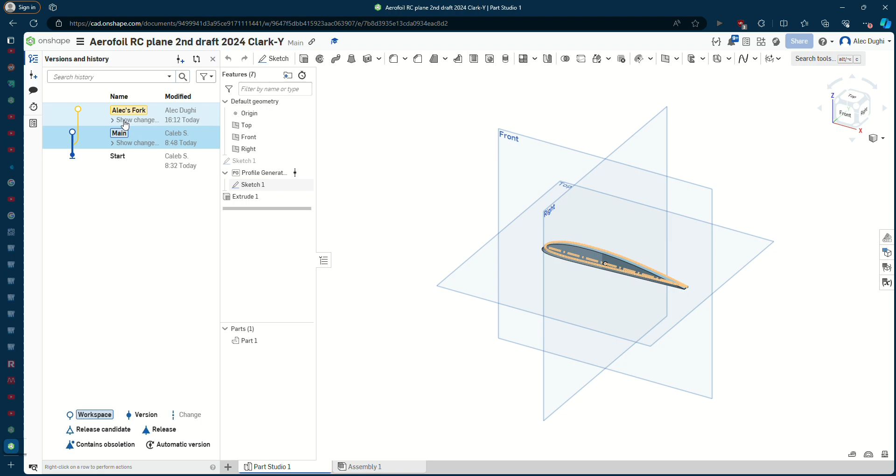We could have gone ahead and instead of changing your 3 millimeters or whatever - sorry, just for ease, I'll show you a thing. I'm gonna pretend like none of that happened. So we're back to your thing, and instead of 3, or instead of 1, we're gonna choose 8 instead of 3.5, right? That could have been the same thing, but this is

pretty heavy now, right? If we're 3D printing this, a lot of the times when we're 3D printing, we're not printing 100% infill. Like there's some air in this. But even with the air, it's still a pretty heavy part, because whatever you're doing on the inside here, you're doing for the whole 8 millimeters.

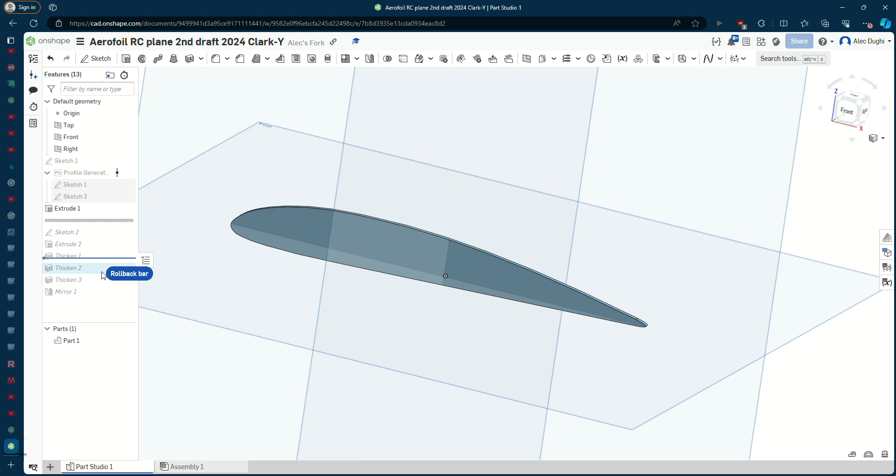So all this being said, I just want to do that. The reason we want to make it wide is for alignment and all of that, right? Imagine if it was paper thin and you try wrapping something around it, it can easily just collapse to one side or the other. Let's say we're wrapping something around it, and it just goes all the way to the left or to the right - there's nothing really holding it up. Now it's got some feet to hold it up, or hold it in all directions, not just up.

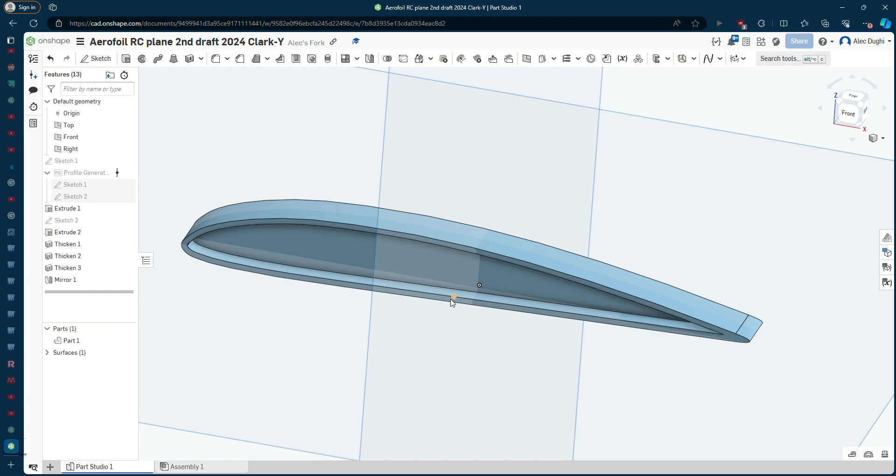So there's that. The reason these are 1 millimeter is because that's kind of the smallest we can get away with. We can go with 0.5 millimeter, probably be fine, but it wouldn't save a ton of weight. Let's see. And that's about it, right? So that's kind of decent.

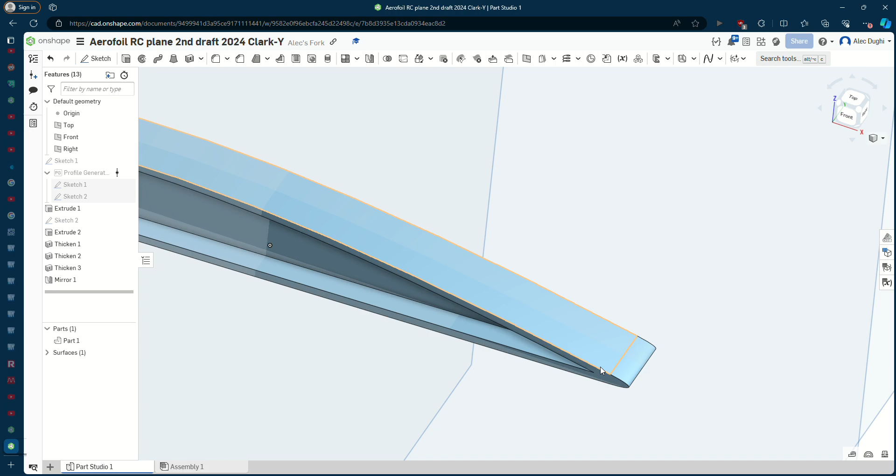Remember, this is for a flat, rectangular wing. If we were doing some kind of elliptical wing, then it can't be straight - we can't do a straight extrusion. It would have to be some kind of loft, because this would be bigger than this. It's going towards the tip, it's getting smaller. So much more complicated. We will come to that, but for now, this is a great start.

To 3D print this though, I don't want to lay it flat like this.